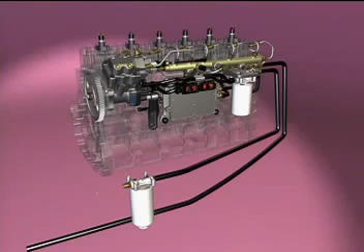Fuel drawn from the tank flows to the OEM-supplied pre-filter. This filter is a minimum 10-micron filter with a water-in-fuel sensor. Fuel leaves the pre-filter and flows to the inlet of the ECM cooling plate.

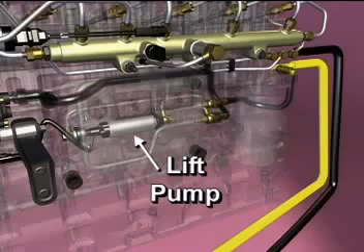The lift pump is controlled by the ECM and runs for approximately 30 seconds whenever the key switch is turned to the run or start position. The output from the electric lift pump ensures that the gear pump is primed so the engine can start quickly.

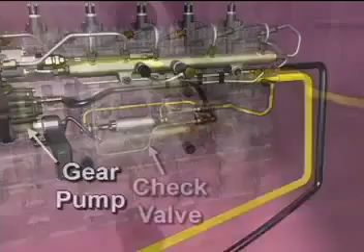A check valve incorporated into the outlet fitting of the ECM cooling plate ensures that the lift pump output goes to the gear pump and not through the ECM cooling plate. When the gear pump speed reaches sufficient levels, it pulls fuel directly through the ECM cooling plate and the open check valve that is installed in parallel with the electric lift pump.

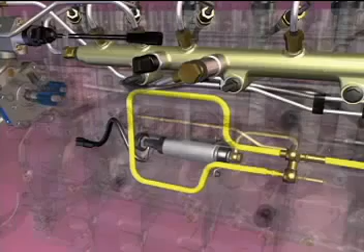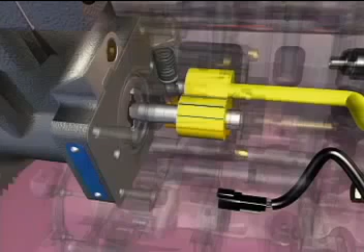Fuel enters the gear pump, where it is pressurized to a minimum of 10 psi at cranking speed and 70 psi with the engine under load. Before the fuel leaves the gear pump, it passes a pressure regulator valve. When fuel pressure is above 175 psi, it acts against spring tension to open the valve. The fuel is returned to the inlet side of the gear pump.

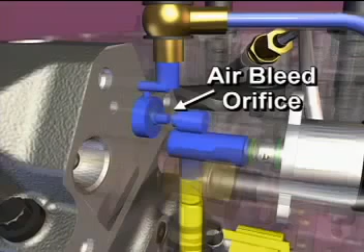The output from the gear pump flows to the pressure side fuel filter. This filter has a 2-micron rating. Fuel from the filter returns to the actuator housing. An air bleed orifice in the housing allows a small amount of fuel to flow to the drain. Any air in the fuel is pushed through this orifice and prevented from entering the high-pressure pump.

The fuel pump actuator receives a pulse-width modulated signal from the ECM. This fuel pump actuator controls the amount of fuel metered into the high-pressure pumping chambers. Controlling the fuel flow into the high-pressure pump prevents pressurizing more fuel than is needed. This actuator is a normally open valve. Current is increased to reduce flow to the pump, thus lowering fuel rail pressure.

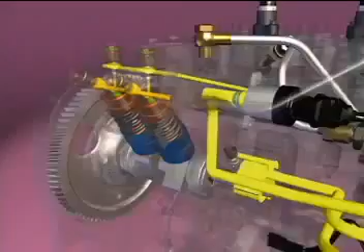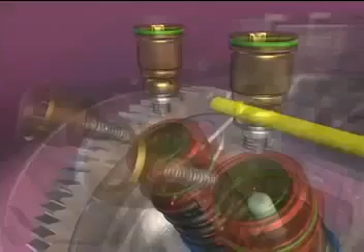In the high-pressure pump, the fuel is pressurized by the two cam-driven barrel and plunger assemblies. These assemblies create the high pressures needed for injection. Inlet and outlet check valves act to develop and hold fuel rail pressure. The inlet check valve holds fuel inside the pumping chamber so that it may be pressurized. The outlet check valve holds the fuel rail pressure inside the rail so that it does not leak back into the pumping chamber.

A failure of a single pumping chamber results in a pressure imbalance and possibly low rail pressure. The ECM can detect this condition and will register a fault code. Fuel that leaks past the barrel and plunger is collected in a drilling in the pump head and routed to the air bleed circuit for return to the fuel tank.

The pressurized fuel leaves the high-pressure pump and flows through piping to the fuel rail. This rail and the high-pressure fuel line serve as an accumulator, storing the fuel under pressure until it is needed for injection.

Because the actuator is a normally open valve, any circuit problem, such as an inadvertently disconnected actuator wire, will cause the actuator to open. This results in maximum flow to the high-pressure pump, leading to opening of the fuel rail pressure relief valve. This valve protects the rail, lines, and injectors from any malfunction causing overpressurization. When the fuel in the rail exceeds the valve setting, the valve opens and fuel is returned to drain.

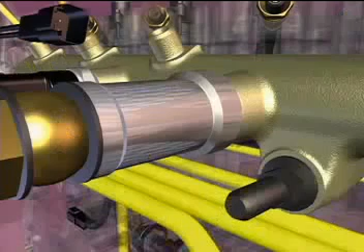The fuel rail pressure relief valve is a two-stage valve. When closed, only a small area is exposed to the fuel in the rail. This makes the valve a fast-acting valve that opens at approximately 1800 bar. Once opened, the outer plunger moves to its stop and a larger area is exposed to the high-pressure fuel. This causes the inner plunger to open and rail pressure drops to 1000 bar. After the fuel rail pressure relief valve opens, the rail pressure must approach zero to reseat and close the valve.

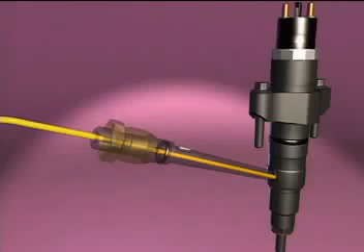The fuel rail is connected to each of the injectors by a fuel line and a high-pressure connector. Edge filters in the high-pressure connectors trap large particle debris. If an injector is replaced, a new high-pressure connector must be installed. At the injector, fuel flows through the supply inlet passage, pressurizing the injector nozzle and the control chamber above the injector plunger.

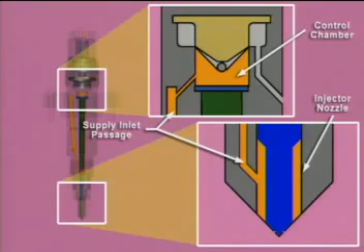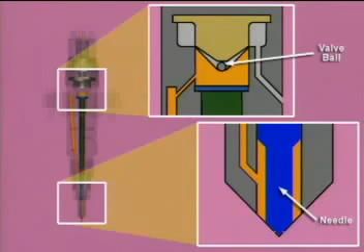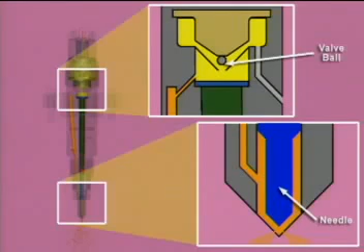Injection begins when the ECM energizes the coil and allows the valve ball to lift off of its seat. This allows fuel to flow out of the control chamber to drain, reducing the pressure in the chamber. The reduced pressure above the control plunger allows the needle to lift off of its seat and high-pressure fuel to flow into the cylinder through the nozzle. Since the drain passage is slightly larger than the supply passage, the fuel pressure above the control plunger does not build as long as the valve ball is off its seat.

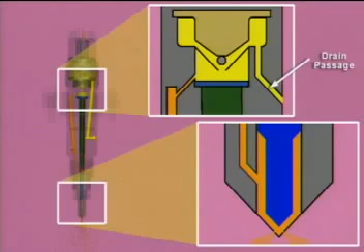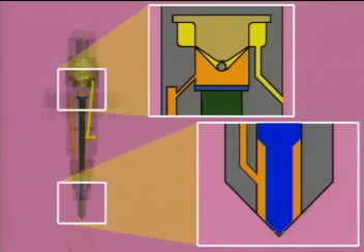To end injection, the ECM de-energizes the coil, which seats the valve ball. The pressure above the control plunger and the force of the spring causes the needle to seat in the nozzle and end injection. Fuel flowing out the fuel return from the injector flows back to the fuel drain block.

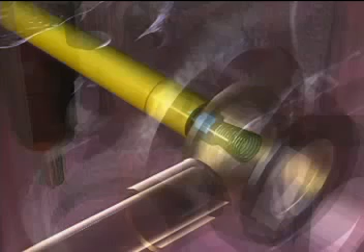The drain line check valve is installed in the fitting in the cylinder head. This check valve maintains 0.7 bar back pressure on the injectors. The drain lines route drain fuel from the injectors, fuel rail, and fuel pump to the fuel drain block. From the drain block, a drain line allows the drain fuel to return to the fuel tank.

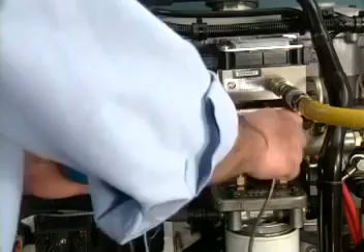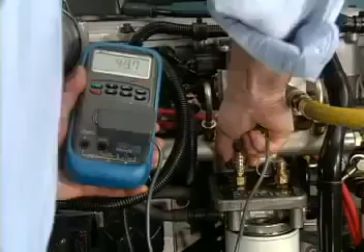The restriction of the pressure side fuel filter is checked using the fitting on the fuel filter mounting head. Record the pressure at the filter inlet, front fitting, and then at the filter outlet, rear fitting. If the difference between the two readings exceeds specification, the filter must be replaced.

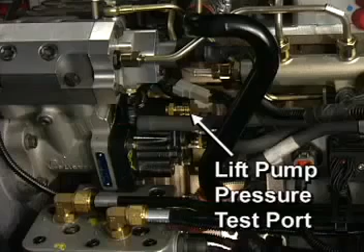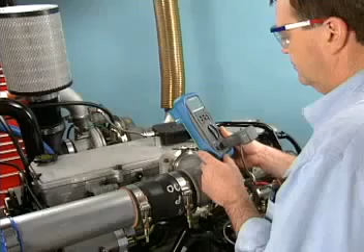The output of the lift pump can be checked using a pressure gauge at the inlet to the gear pump. A test port is located on the back of the gear pump for this purpose. Turn the key switch on and record the lift pump pressure. If the lift pump pressure is low while the lift pump runs, make sure the system is primed and the check valve at the ECM cooling plate is not blocked open before replacing the lift pump.

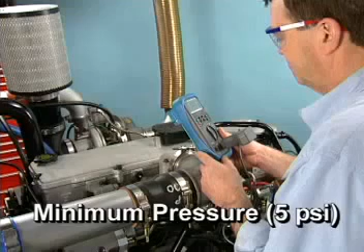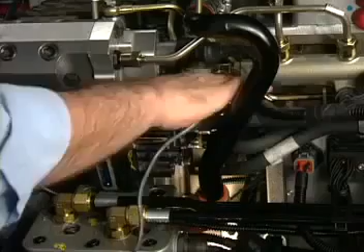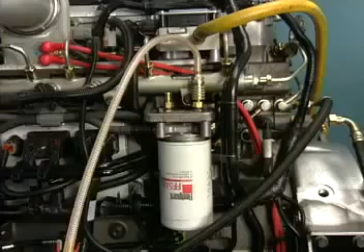To test the low-pressure fuel system restriction, install 0 to 30 inches mercury vacuum gauges at the gear pump inlet and at the OEM connection manifold prior to the ECM cooling plate. Install a .043-inch orifice diagnostic tool at the pressure filter head to simulate fuel flow at rated engine speed. Run the engine at high idle and record the gauge readings.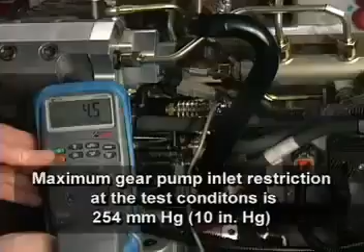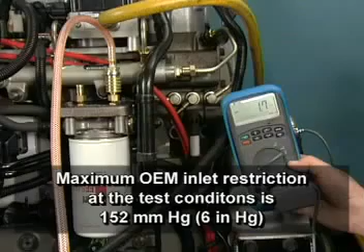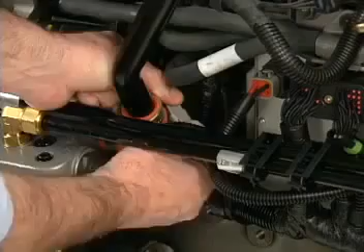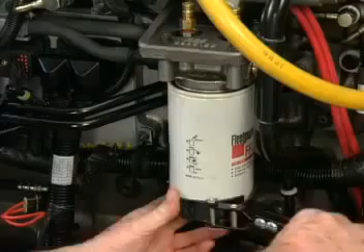Should it be necessary to replace the lift pump, begin by disconnecting the battery. Always disconnect the negative terminal first to reduce the risk of arcing. Disconnect the wiring to the lift pump. Thoroughly clean all fittings and components before disassembly. Debris, water, steam, or cleaning solution that enters the fuel system can cause severe damage. Removal of the pressure side fuel filter provides needed access for service.

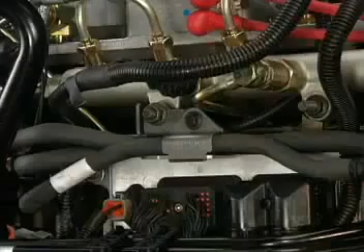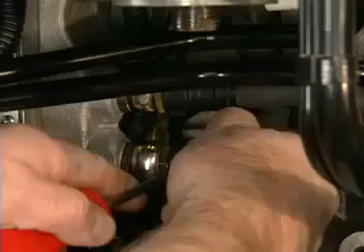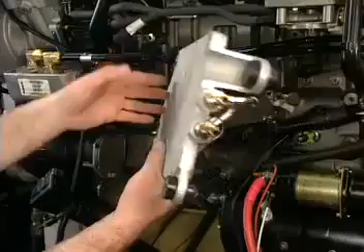Remove the low-pressure fuel line clasp. Then remove the fuel lines at the lift pump and ECM cooling plate. Remove all ECM electrical connectors and wire harness clips. Remove the ECM and then remove the cooling plate. With the ECM cooling plate removed from the engine, the hardware attaching the lift pump to the cooling plate is easily accessible. Remove the lift pump from the cooling plate.

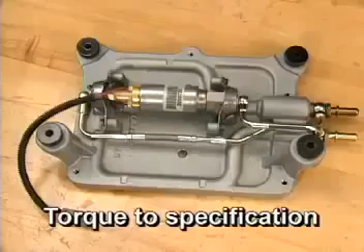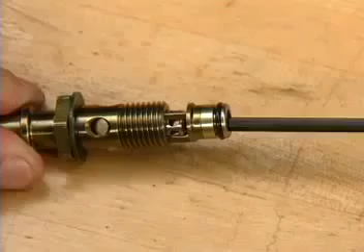Install the new lift pump to the cooling plate. Torque the fasteners to the specification given in the service literature. Install the fuel lines, taking care of the following items. The ECM cooling plate check valve should be checked for cleanliness and freedom of movement. The check valve assembly is then installed in the lower outlet port. The fuel lift pump tubes are supported while tightening the cooling plate inlet and outlet fittings. Do not allow the tubes to bend.

Install the ECM cooling plate and lift pump assembly and the ECM on the engine. Reconnect the fuel lines, low-pressure fuel lines, clamps, and wiring. Reinstall the pressure side fuel filter if removed for access. Reconnect the battery.

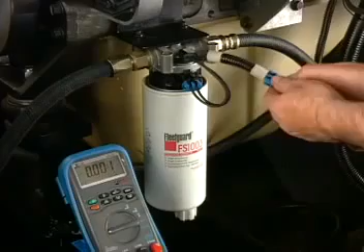With the connector removed and the key switch on, power supply to the heater must be at least 12 volts. If the voltage does not meet specification, refer to the OEM repair manual. The fuel heater is switched on and off by a bimetallic switch at the filter head. Test the switch with an ohm meter. It should register as open, high resistance, above 18 degrees centigrade, and register as closed, near zero resistance, below 1 degree centigrade.

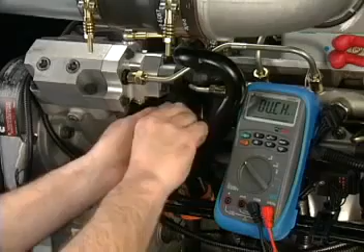The fuel pump actuator can be tested for open and short circuits using an ohm meter. Resistance from the positive fuel pump actuator pin to ground must be at least 100 kilohms. The resistance from pin to pin of the actuator should be 1.5 to 5.0 ohms. If the actuator does not meet these conditions, the actuator must be replaced. Remove the cap screws that hold the fuel pump actuator to the actuator housing, and remove the actuator.

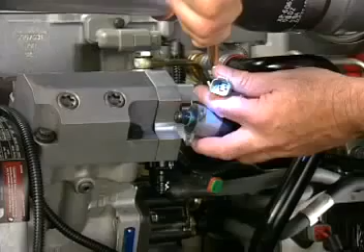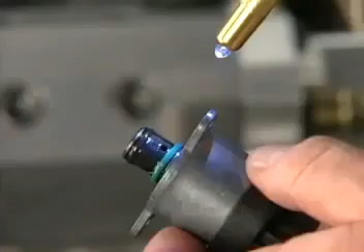Inspect the actuator pins for wear or corrosion. Closely inspect the pigtail harness for wire insulation damage. Inspect the plunger through the 3 fuel passage windows. A shiny, scratch-free surface indicates the actuator is acceptable for reuse. Any signs of scuffing, especially when accompanied by intermittent fault codes 449, 2215, or 2216, indicate the need to replace the valve.

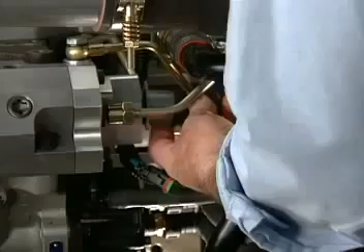To install the actuator, lubricate the O-rings with clean engine oil and install the fuel control valve in its housing. Do not use the cap screws to pull the actuator into the housing. Torque the cap screws to specification. Connect the engine wiring harness to the fuel pump actuator. Start the engine and check for leaks.

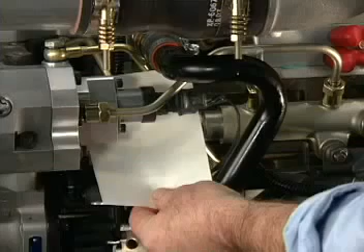Disconnect the wiring harness from the fuel pump actuator. Disconnect the fuel supply line at the actuator housing. Disconnect the high-pressure fuel line from the actuator housing. Disconnect the fuel drain from the actuator housing. Remove the 3 cap screws that hold the fuel pump actuator housing to the high-pressure fuel pump head. Remove the actuator housing and gasket.

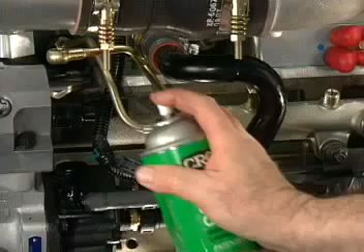Clean the mounting surfaces of the pump head and actuator housing with contact cleaner. Install a new gasket. Note, this gasket should be installed dry. Install the housing on the pump and torque the cap screws to specification.

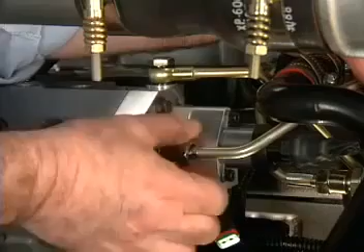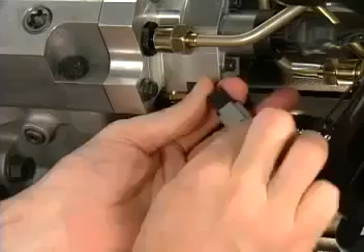Reconnect the high-pressure fuel line, the low-pressure fuel supply line, and the fuel drain line. Reconnect the wiring harness. Remove the fuel pump actuator housing following the procedure given elsewhere in this training.

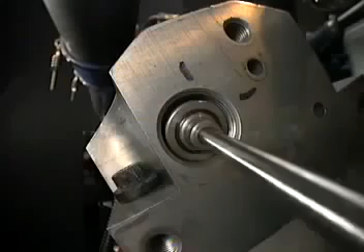Remove the high-pressure fitting from the threaded hole in the back of the high-pressure pump head. Note, if it is necessary, use a tapered punch to remove the seal washer. Insert the punch into the center of the seal washer and work the seal out of the bore in the pump head.

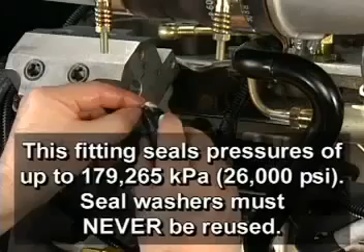Inspect the thread and cavity in the pump head for nicks or burrs. Clean the outlet fitting bore with contact cleaner. Install a new seal washer onto the fitting. A small amount of Lubriplate will help to keep the seal in position during installation. Torque the fitting in the high-pressure pump head to the torque specified in the service literature.

Install the fuel pump actuator housing and reconnect the fuel lines and wiring using the procedure given previously in this training. Operate the engine and check for leaks. When checking the pump high-pressure fitting, snap the throttle several times to increase the fuel rail pressure.

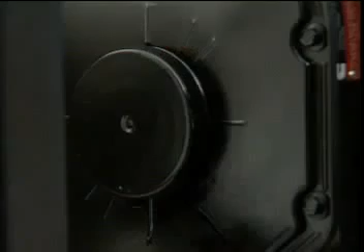The high-pressure fuel pump head can also be replaced without removing the pump from the engine. Begin by removing the fuel pump actuator housing. Follow the procedure given previously in this program. Remove the fuel pump drive gear cover and bar the engine over slowly to top dead center. This is where the line on the pump gear aligns with the line on the gear cover.

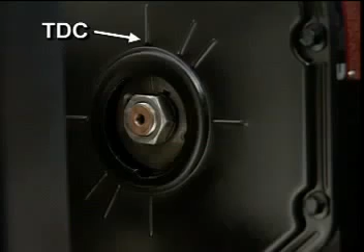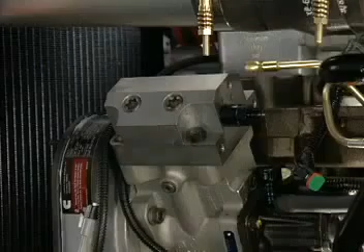Remove the upper support bracket. Remove 2 of the 4 pump head cap screws. Remove screws located diagonally from one another. Remove the last 2 cap screws by loosening each cap screw 1 turn at a time. Alternating between the 2 cap screws prevents the housing from binding under pressure from the plunger springs. Support the pump head to prevent it from falling as the cap screws are removed.

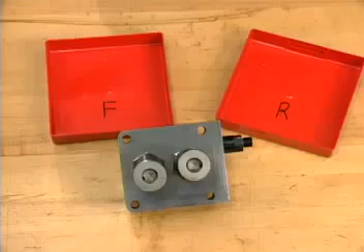Remove the springs and spring retainers from the barrel retainers. Keep track of the position of these parts so that they can be returned to their original location. If a new pump head is being installed, it will be supplied with new springs and tappet retainers.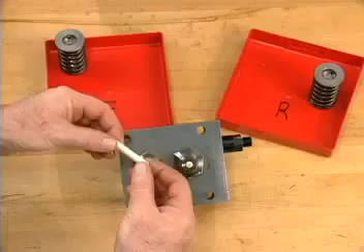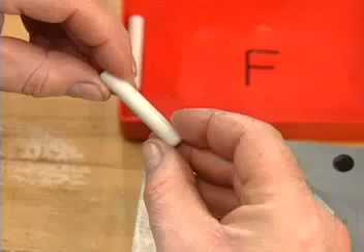If the plungers are fully upward in their bore, light air pressure at the inlet fitting may be used to aid in plunger removal. Remove the plungers one at a time and inspect for damage. Scoring or scratches that can be felt are reason to replace the pump head. If the plungers are acceptable for reuse, they should be cleaned with contact cleaner.

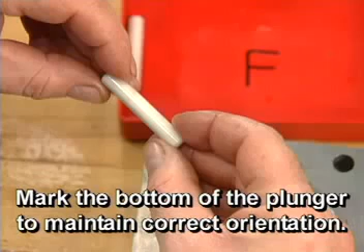The plungers must be returned to their original barrel in the original orientation. If necessary, mark the bottom of the plunger with a felt tip marker to aid in maintaining correct orientation. Return the plungers to their original locations. Install the springs and spring retainers on the barrel retainers from which they were removed.

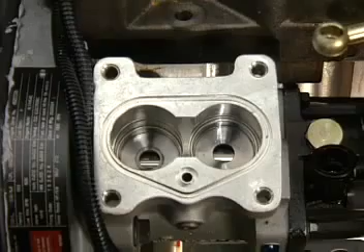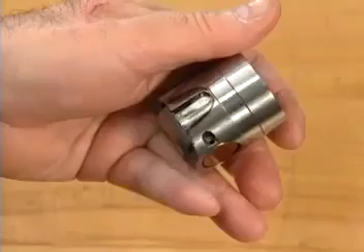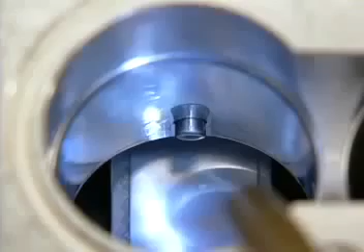While the fuel pump head is removed, inspect the cam housing, tappets, and tappet bores. Use an O-ring pick to remove the tappets from their bores. Inspect the camshaft for wear. Measure the tappet guide groove and compare the measurement to the specification in the T&R manual. Visually inspect the tappet guide pins and replace the fuel pump if the pins exhibit more than 25% wear.

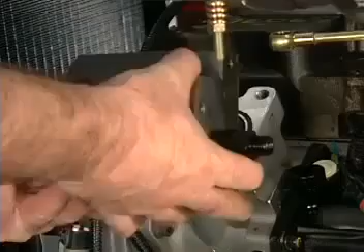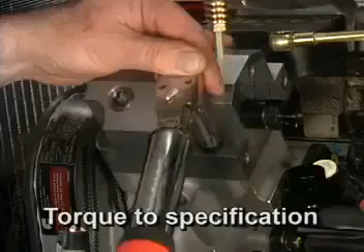Reinstall the tappets into the tappet bores from which they were removed. Then install new O-rings on the cam housing. Draw the pump head down by alternately tightening 2 of the pump head bolts that are diagonal from each other until the head just touches the cam housing. Install the remaining 2 pump head bolts. Torque the pump head bolts to the specification listed in the service literature.

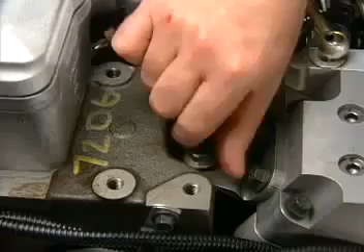Connect the upper support bracket to the high-pressure pump head in the following order. Connect the bracket to the pump head, installing the bolts finger tight. Connect the upper support bracket to the cylinder head and torque the bolts to specification. Torque the bolts holding the support bracket to the high-pressure pump head. Reinstall the fuel pump actuator housing, fuel lines, and wiring using the procedures given previously in this training. Reinstall the fuel pump drive gear cover.

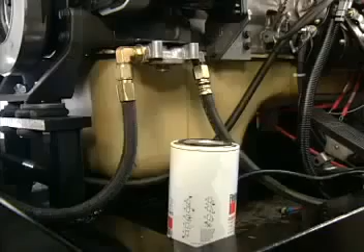Priming a system that has been run out of fuel or has new filters installed may require several lift pump cycles. It is recommended that the OEM-mounted 10-micron suction side filter be installed full of clean diesel fuel and the engine-mounted 2-micron filter be installed empty. It is also important that the 10-micron filter have a standpipe. If the 10-micron filter has a standpipe, the fuel lift pump should be able to fill a dry pressure side system within 3 or 4 lift pump cycles.

If the warning lamp lights as a result of water present in the suction side filter, the pressure side filter should be replaced. This is due to the fact that the pressure side filter has some water stripping capabilities, but no provisions for draining.